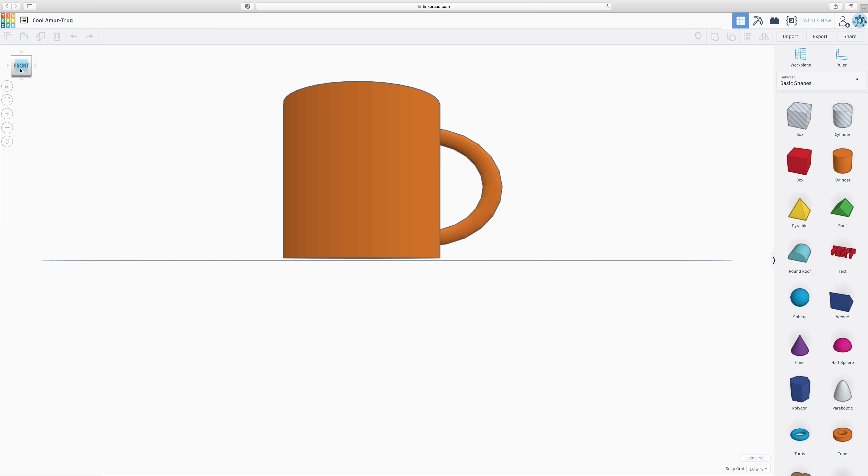So you've created in your sketches your side view 2 and your bird's eye view. Those are the sketches you should have. Can you please try navigating your view cube to make sure it's easy? But again, if you get lost, home view.

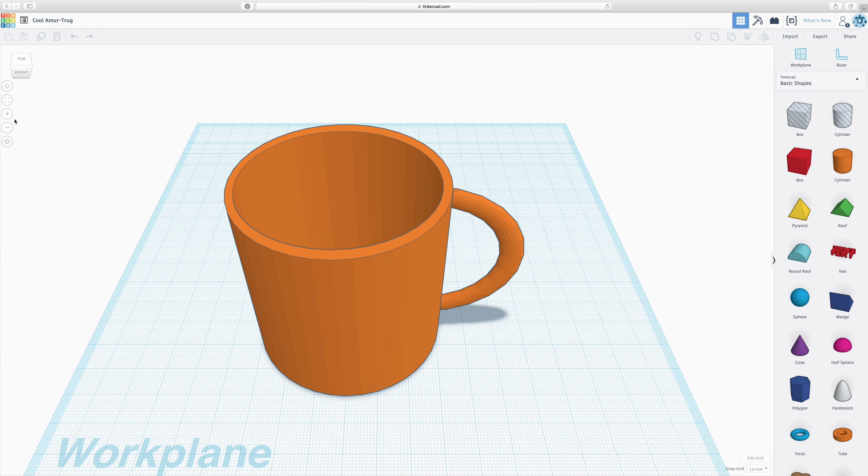This one is your fit-on window, which means it only allows you to see your two-dimensional shape, and you can zoom in and zoom out with the plus minus tools there. Just like your home view, that's kind of the orthographic standpoint, thinking of your clientele and if that's actually a usable thing. Home view kind of does the same thing, but it's more viewed out.

Okay, so I'm going to delete that and we're going to make it together. So it is a cylinder, that's the starting point. Things to note, you have basic shapes here. This is what you're combining and merging or subtracting to make your shapes. You can create custom shapes, but that is a later tutorial.

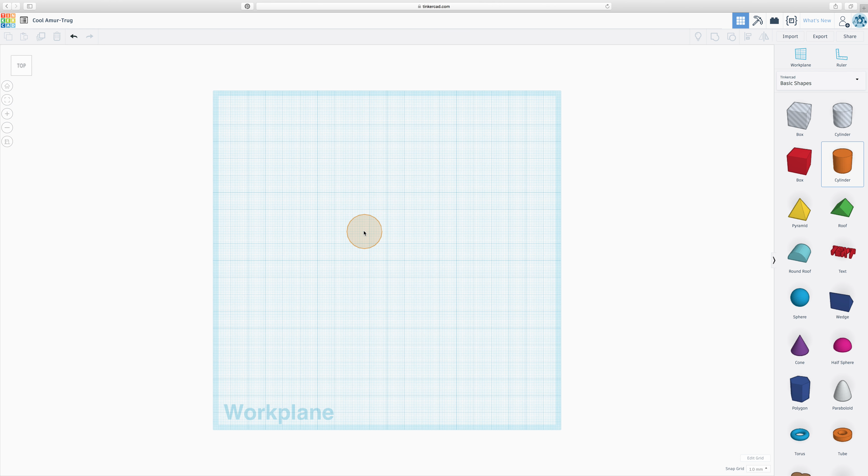So when you bring in your shape, you have to figure out your size, okay? Right now it says 20, but I don't know the measurement or increment of that. At the very bottom, I can see here that I'm in millimeters. Edit grid, this is where I talked about knowing what you worked in. I tend to think in inches, so I'm changing mine to inches because that is the design usuals. So update grid, everything's kind of done in inches.

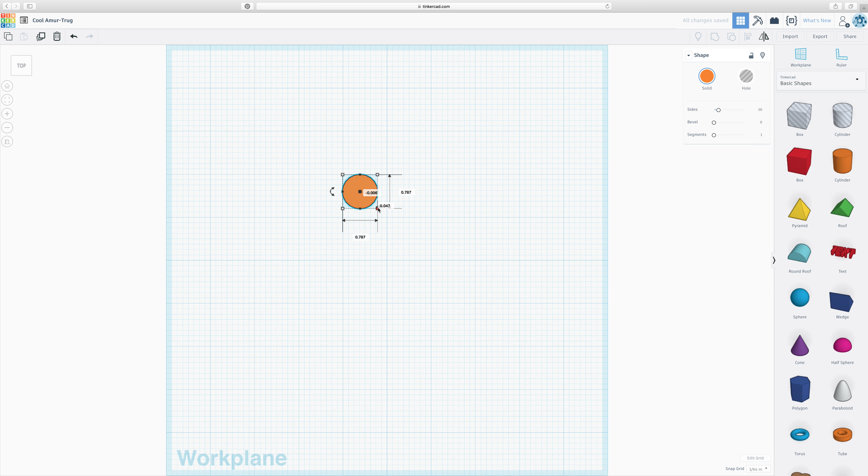So looking at this, I have 1, 2, 3, 4, 5, 6, 7, 8, 9, 10. This tells me that each single grid is 1 inch by 1 inch. So if I'm aligning it to snap to that, you can snap to your inches, or you can turn it off. If I'm aligning it to snap to my inches, I'm going to scale it and you can see the size of your cup going. You can choose to type in the number if you know that it's 3.25 by 3.25, then you have your shape to start.

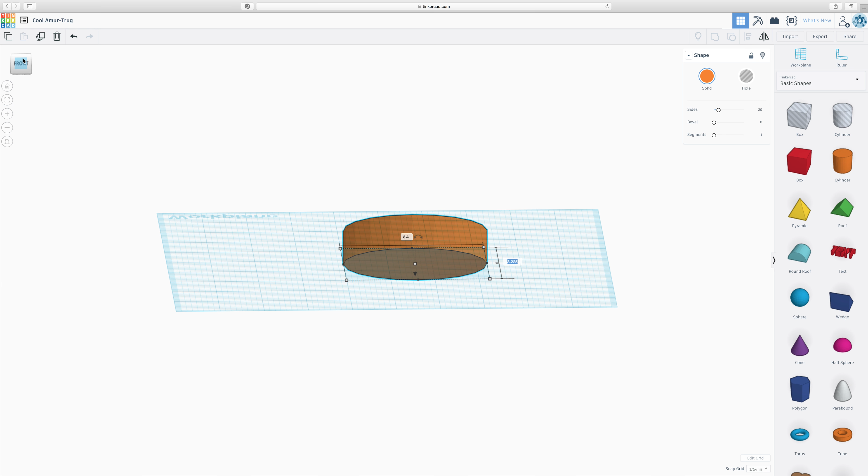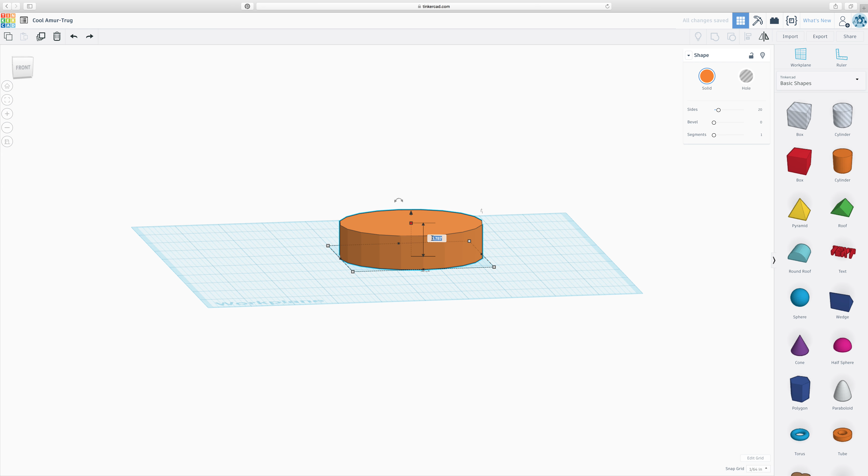Now this is where your viewpoint's important, because currently, as you can see, it's only a certain height. So it's important that you orient the height as well. How tall is my mug going to be? That's an important question. I'm going to type in the number into that grid there. So my mug is going to be about 4.5 inches tall. That looks way too tall. Let's do 4, okay.

So here is my mug. Sound good? Now, key things - you actually want to add a handle to your mug. That is done with a torus.

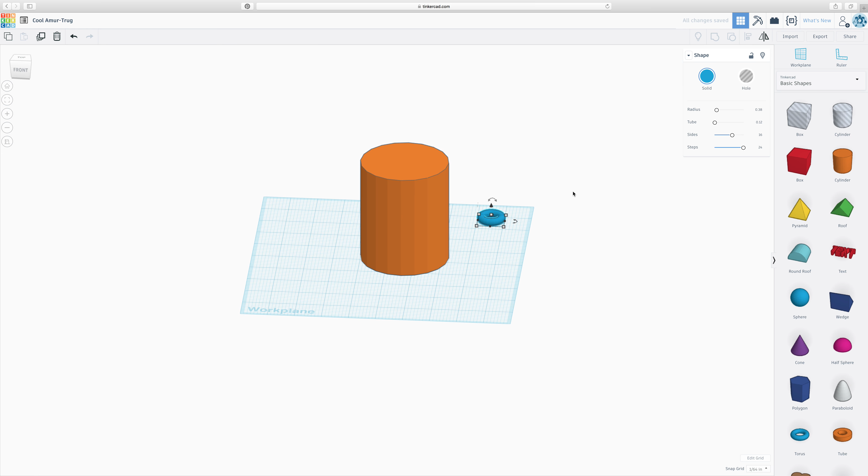To rotate a torus, you can choose to use these side viewpoints. If you're not on the right view, you're not going to see the right rotation axis. So that's really important to make sure you're on the right view angle to see the right axis. So to turn it the other way to actually move into the mug, I need to actually change my viewpoints.

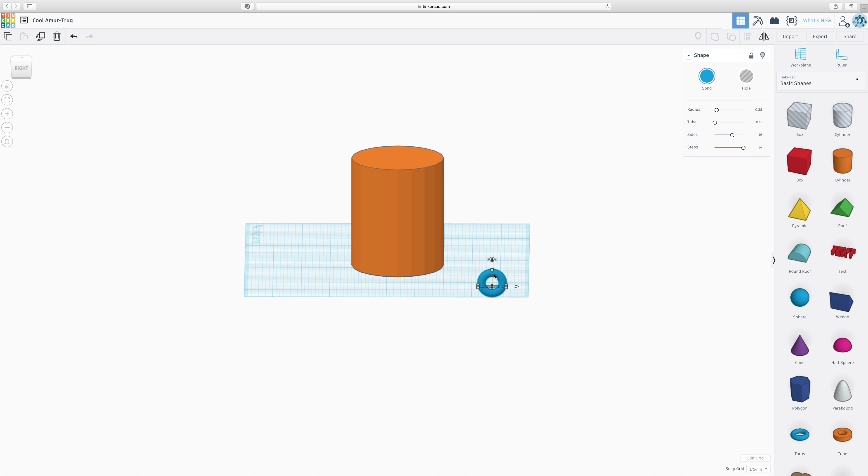So from here, I want to scale it, and it's just a handle, so I'm just going to freeform it.

It became very wide very fast. There we go.

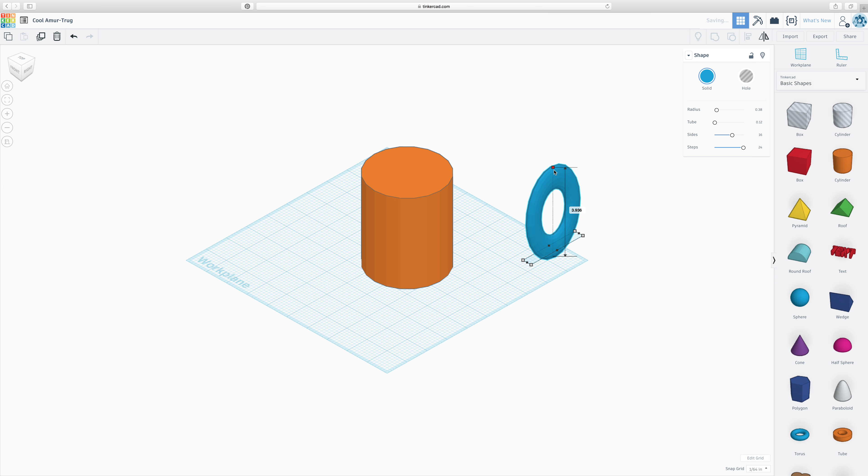If you hold shift, it scales everything uniformly, but you can always customize the width and the height, and then I'm just going to click and move that into my mug.

Always make sure you're looking at it from many viewpoints to make sure it actually is lined up. I find when you look at different viewpoints, things look a little bit different. There you go, see, it's extruding below the bottom.

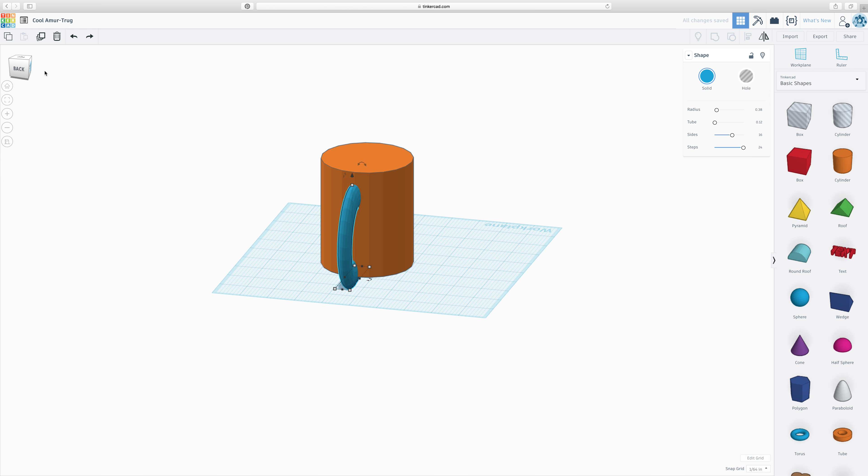And that did not move up or down, so let's go to one viewpoint and move that up. All right, let's go to a side view.

And then I see my mug is way too fat of a handle, so I'm just going to shrink that down a little bit.

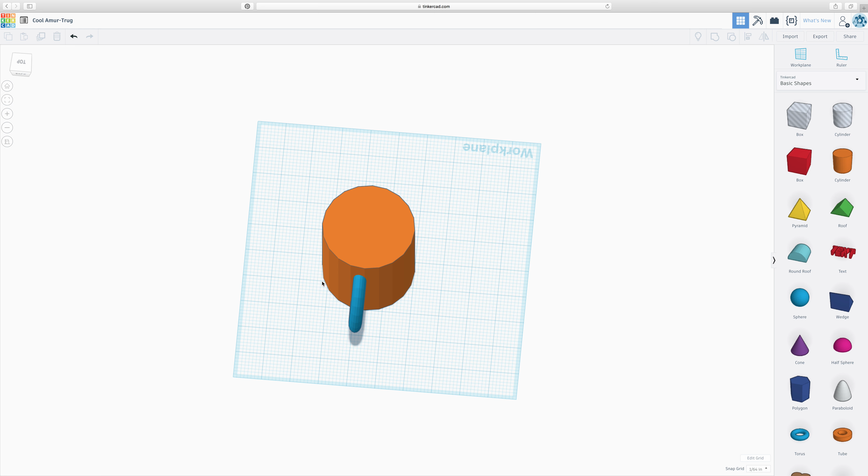Okay, so I think I'm pretty content, other than the fact that it's sitting too low, so I'm going to move that up a little bit. There we go.

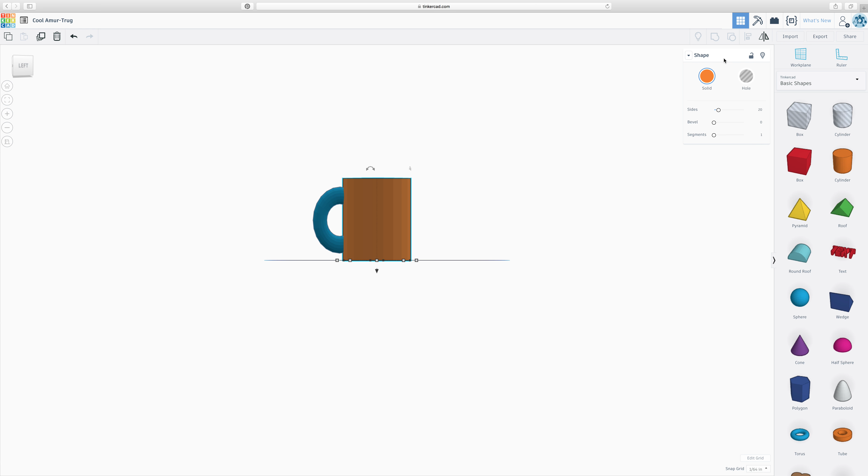Okay, so now things to note: when you select multiple things, you have more options. When you have one thing selected, you have fewer. So if you want to see more options, you can select multiple things.

So I'm going to go to the top view and select both the torus and the cylinder, and I'm going to align them. I want them to be center aligned, meaning it goes to the center of this larger shape, so it's in the center of my mug. There you go, so it's aligned.

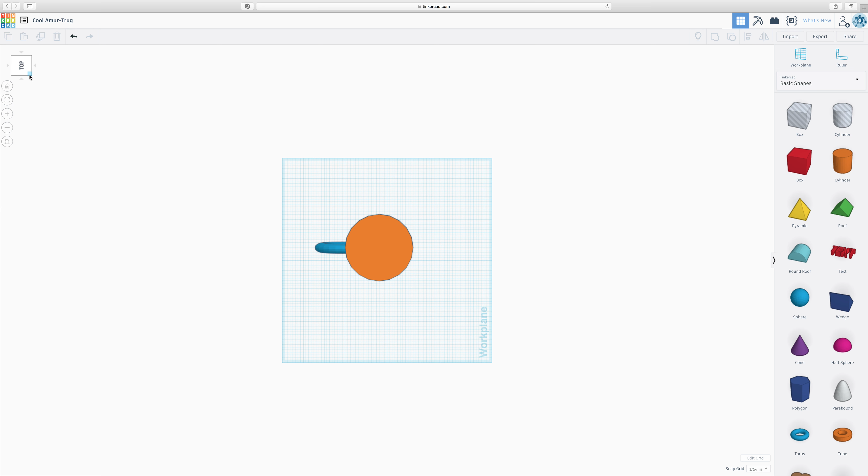Now, if this is bothering you that they're separate colors, you can always change the color of your shapes to whatever color you so choose.

Okay, next thing is we're going to create a hollow to this. Now, unlike 123D, there isn't just a button that I can shell. I wish there was, but there's an easy way around it.

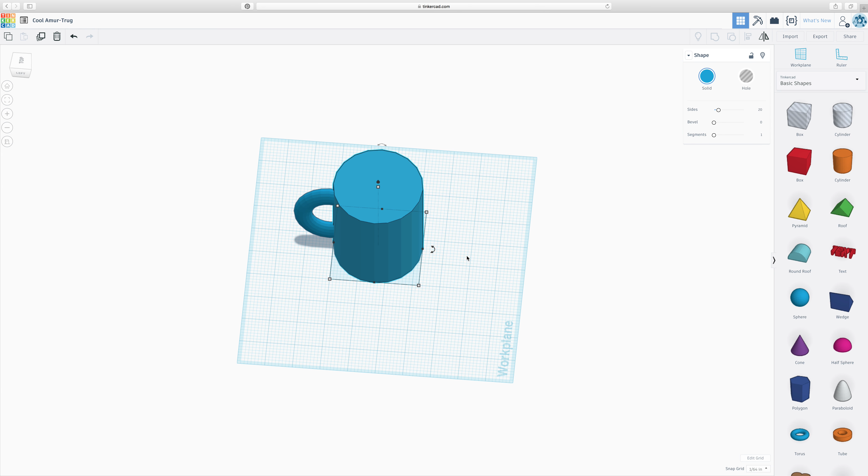I'm going to copy and paste this mug, and I'm going to simply just scale it down a factor, and then I'm going to move that into the mug. So I'm just going to bring it up so it's easier to see, so it extrudes a little bit.

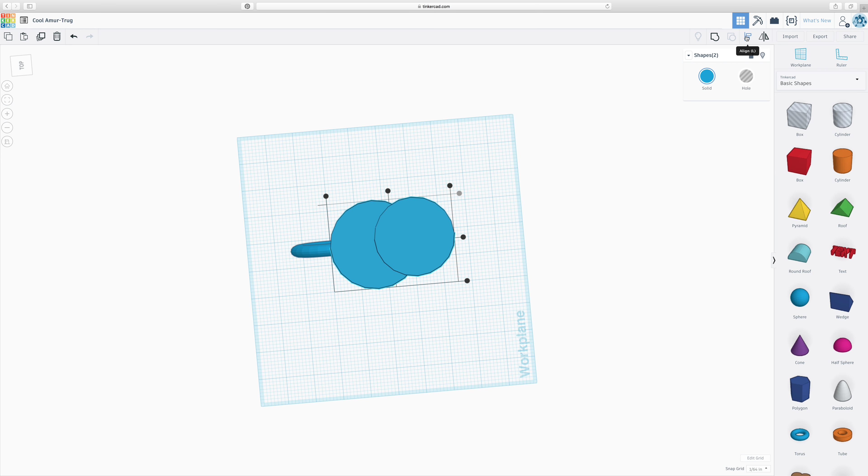But I'm going to select circle A, circle B, and when you have two things selected, you have more options. I'm going to again center align this together.

First thing, before you do that, because these are now where I want them to be, I'm going to group them, so that's considered one shape.

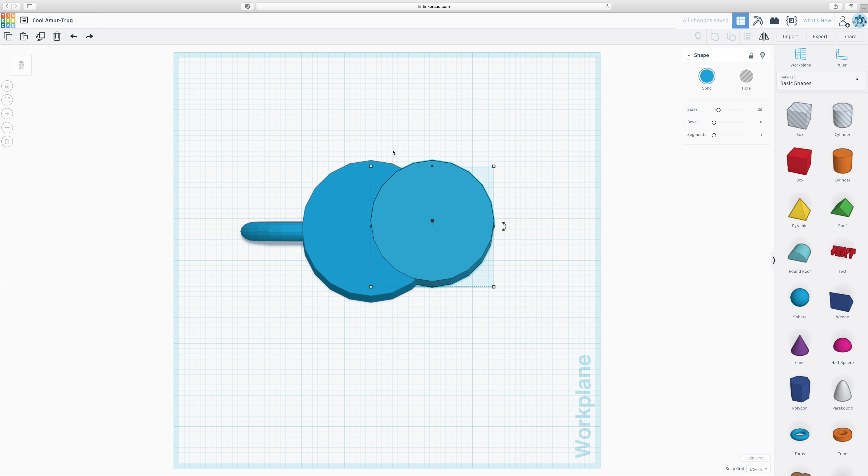Okay, now when I go to my grouping, I'm selecting the cylinder with the mug handle and the second shape. Align. I want it to go again to the center of that and the center of that.

And obviously it's okay if I need to customize a little bit. Again, always look for multiple viewpoints, but I find looking at a straight view versus an angled view is always a little bit more clear about where you are.

And you can move with the indicators, the arrow keys on your keyboard, to move smaller viewpoints.

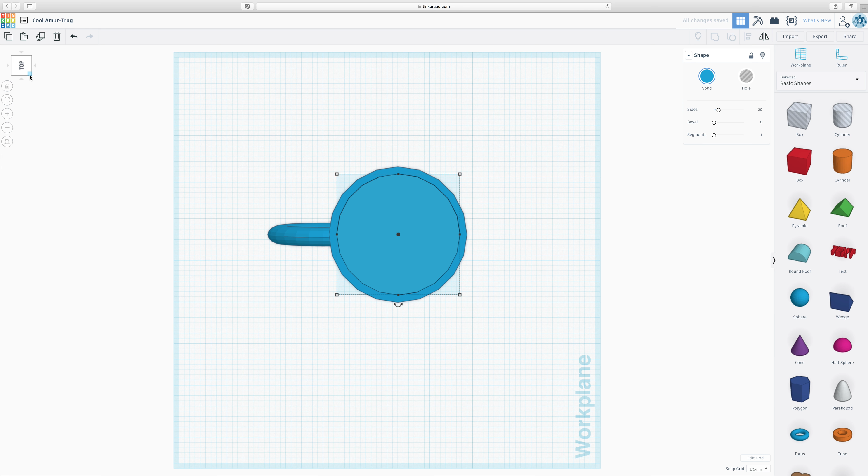So what you're going to do is select that inner shape. Make sure it doesn't go all the way to the bottom, because then you have a hole in your mug.

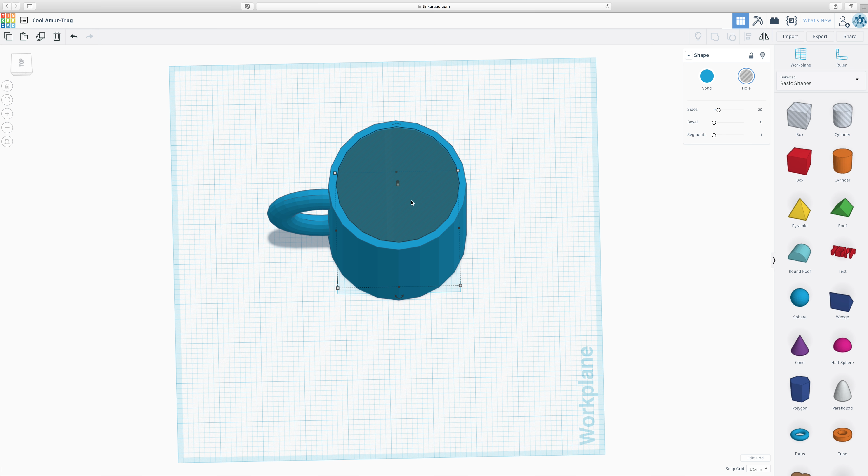And you're going to select the inner shape and select hole, which actually isn't a hole yet. It gives you the illusion, but if I move that, the hole's gone.

So then what I do is I select my mug thus far and the hole, so I have everything selected. And when I group them now and I select group, it now will shell out.

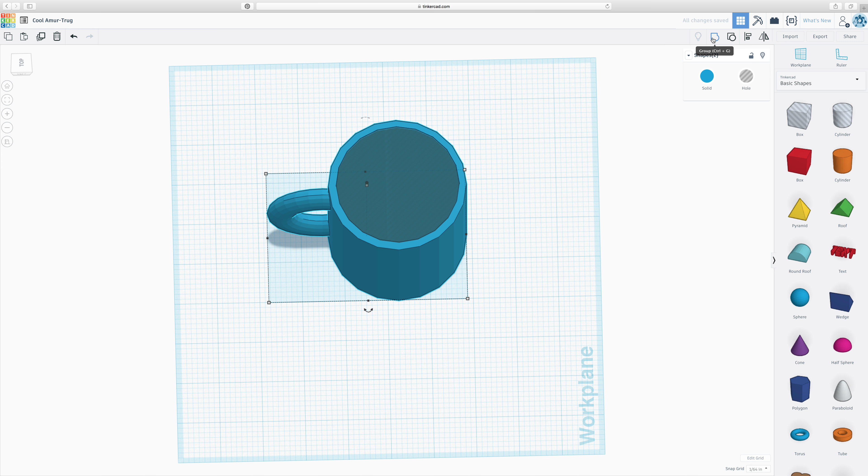So if you are using this and you want to hollow something, you have to take the solid shape, convert it to a hole, select the shape you want to remove it from, and then group. That's when it will actually cut away from your shape.

And then I have this mug. If you want to clean up your mug, when you select it, we can do that in the exporting stages. But I just wanted to start you with some basic merging, subtracting, and orientation.